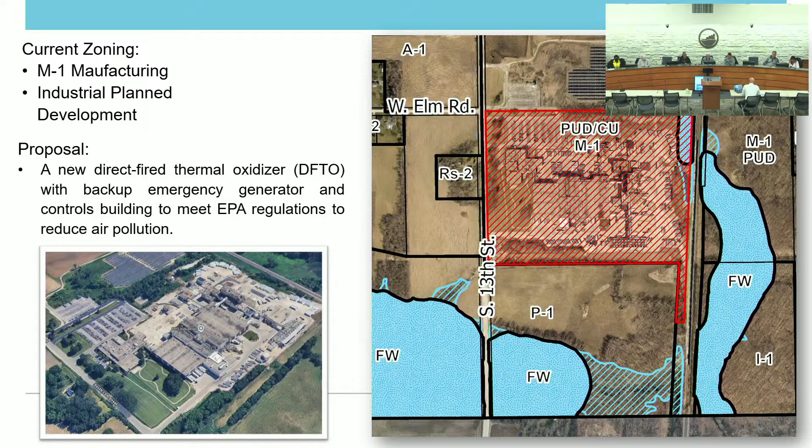This property is zoned M1 manufacturing, within an industrial plan development overlay. The applicant is seeking approval for a new direct fire thermal oxidizer along with a backup emergency generator and a controls building. These are required by EPA for regulating and reducing air pollution, so they're putting these in to meet those requirements.

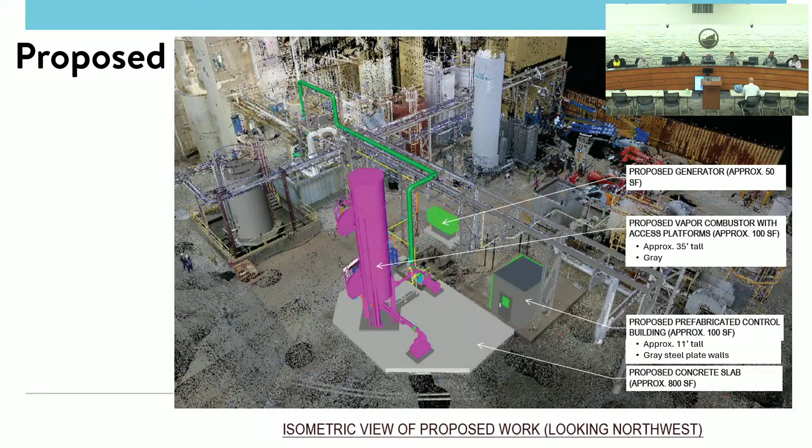They will be adding some lighting to the site. There are two platforms on the vapor combustor, and each will have 2 light fixtures, pole mounted, each 7 feet tall, all directed downward, at 4,000 Kelvin color temperature. There will also be a wall-mounted fixture roughly above the door of the proposed controls building, also downward facing, at 4,000 Kelvin color temperature.

Because of the location and the fact that it's already surrounded by paved concrete areas, there's no requirement for landscaping for it.

So the applicant's here if you have any questions about it. Otherwise, I have a suggested motion on the screen for you.

Great, thank you, Todd. Does the applicant want to wait on questions or make a statement? Okay, she indicated she'll wait on questions. Christine?

Just for Todd, I'm guessing since it is within the main site, there isn't going to be any additional controlled access, so they have like the main access for safety, right? Yeah, it's at the far east of it. Getting back there, my understanding is it's all behind gates to get to it. The public main entry isn't really an option there. We had no concerns, the fire department had no concerns, and engineering had no concerns about it.

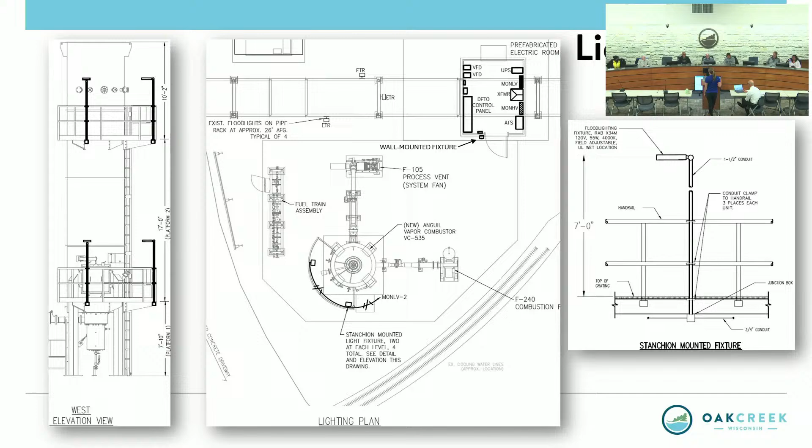So certain parts of our production areas are covered by what's called the MON regulations due to some of the chemicals they handle. This is part of the EPA regulations that are changing, directly related to MON, so it's only affecting that part of the plant, like our resin plant, our tank farm, and waste treatment center. Thank you.

Rossi? No questions, thank you. Okay, I myself have no questions either. I've been on the site numerous times. It's a very well maintained, taken care of plant. And our fire department, I think in the reading, the most key part here, at least from the city's perspective, is our fire department is in lockstep with them.

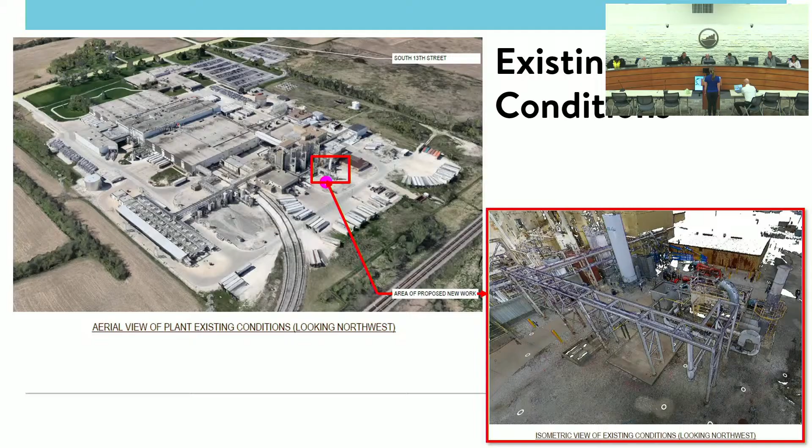There's no further discussion. Motion on item 4: Clerk moves to approve site and architectural plans for construction of a new direct-fired thermal oxidizer with a new backup emergency generator and controls building at PPG Industries, Inc., an existing business located at 10800 South 13th Street, with the following conditions: 1, that all relevant code requirements remain in effect, and 2, that this approval by Plan Commission shall expire within 12 months after the date of approval if a building permit has not been issued.

Guzikowski will second. Roll call, beginning with Steve. Bouch, aye. Lorick, aye. Kevich, aye. Guzikowski, aye. Seifert, aye. Chandler, aye. Anna, aye. Thank you very much.

Item 5, going to review a site and related plans for a dog park at Riverwood Estates Apartment. This is an existing multifamily residential complex located at 535 West Riverwood Drive.

Todd? Yeah, thank you, Mr. Mayor. So you guys remember this site from a couple of months ago? They were here seeking approval for an Amazon hub. Now they're back seeking approval for a dog park that would be located again just right next to the clubhouse pool where they have their leasing management office as well. So they're back looking for that approval. It is multifamily residential and a residential planned development overlay.

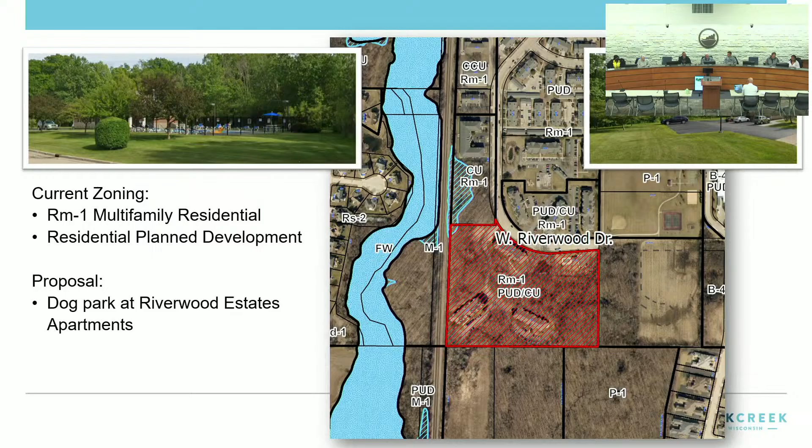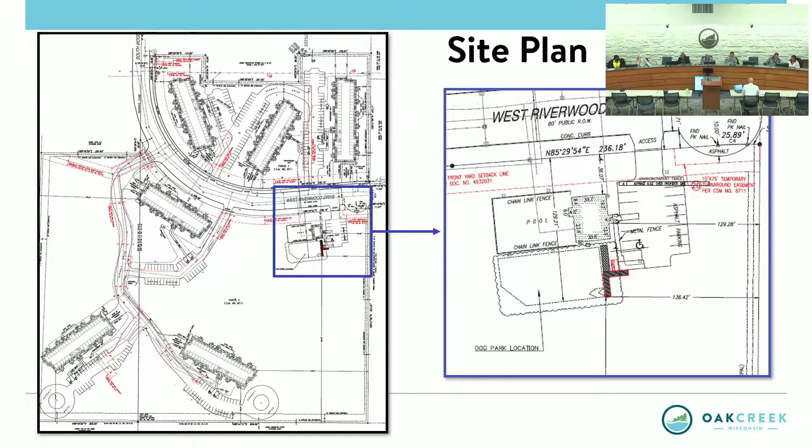If you recall, that clubhouse area is in the furthest east of the apartment complex, just south of West Riverwood Drive. They're looking to put that dog park area to the south of the pool and the south of the clubhouse, so it would be really very difficult to see from the road, given the pool and clubhouse being there.

They are going to be clearing a little bit of brush and trees on site. They did provide inventory on the trees. None of them were requiring replacement by our tree preservation code.

The overall whole area of the dog park is going to be just under 4,000 square feet, surfaced with an artificial turf. That's going to be enclosed within a 4-foot tall black wire steel fence with aluminum trim around it, with a 6-foot wide gate to the east facing the parking lot area.

This entire area is not encroaching on the wetlands to the south, leaving that 5-foot undisturbed buffer area intact, so it won't be disturbing that. You can also see there's a paver that they're going to be adding in as a walkway to get from the parking area to the dog park itself.

They will be adding some additional landscaping, some grasses and shrubs as a border between the dog park area and the pool area, wrapping around to the front with a nice shade tree as well. You can see the existing Amazon hub—that's where you got approval to place that.

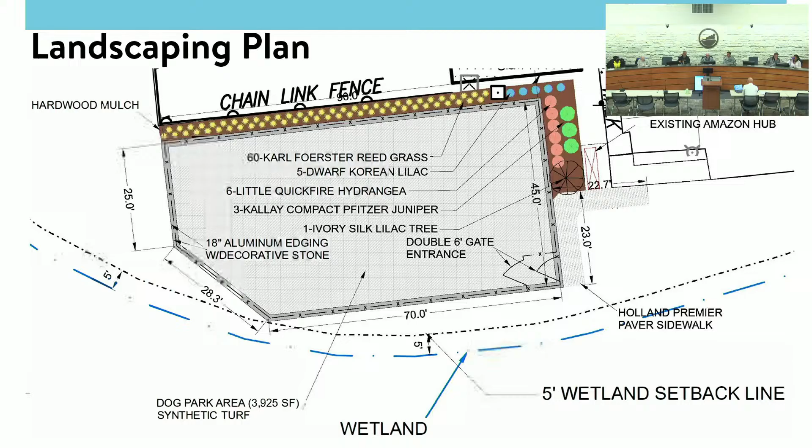The applicant is here for this as well if you have any questions. Otherwise, the suggested motion is on the screen for you. Great, thank you Todd. Applicants, once again, you want to say anything, or wait on questions if you're with us tonight? Okay, they indicated they'll wait.

Let's start, Christine. Just one question, maybe Todd or the applicant: will the residents have an access code or key to the dog park, or how will they get into the park? Make sure that just the residents can access that dog park, not open to the public. For an accurate answer to that, I'd have to defer to the applicant, to how exactly they're doing that.

Need your name and address, sir. Peter Wisniewski, 535 Riverwood Drive. There is no lock at this time. We believe it's secluded enough where residents are only aware of it. It's not an area that's easily accessible to the public. If it becomes a problem, we do have a fob system on the pool, which is required by code for safety. We can add that and expand it. But at this time, we don't anticipate it being a problem. If it is, we'll put a fob system on it.

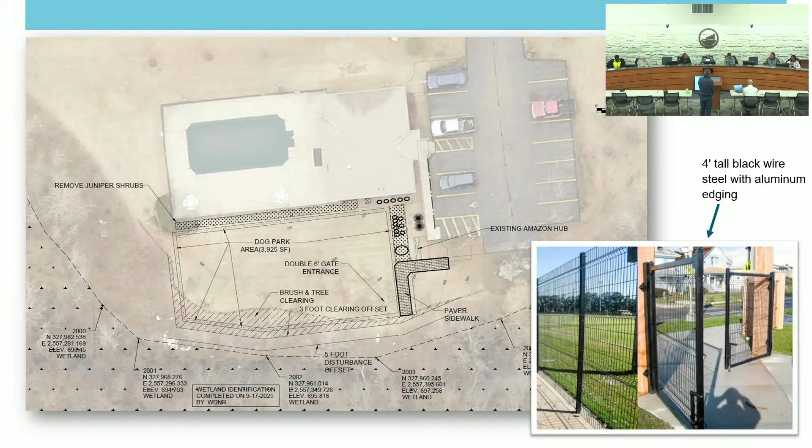Okay, thank you. Oh, my question just got answered. I have no concerns. Chris? This is in my district. I haven't gotten any calls or questions or concerns about it. I'm fine with this plan so far. Brad? Questions? Rossi? No questions, thank you. I don't either. I think it's a nice amenity for folks that are there. It's a great secure area for people to enjoy their pets. So I like to see it. Well done. There's no further discussion.

We'll look for a motion on 5. Clerk moves to approve site and related plans for a dog park at Riverwood Estates Apartment, an existing multifamily residential complex located at 535 West Riverwood Drive, to be approved with the following conditions: 1, that all relevant code requirements remain in effect, and 2, that this approval by Plan Commission shall expire within 12 months after the date of approval if a building permit has not been issued. Guzikowski, a second. Roll call, beginning with Greg. Lorick, aye. Gavich, aye. Guzikowski, aye. Seifert, aye. Chandler, aye. Hannah, aye.